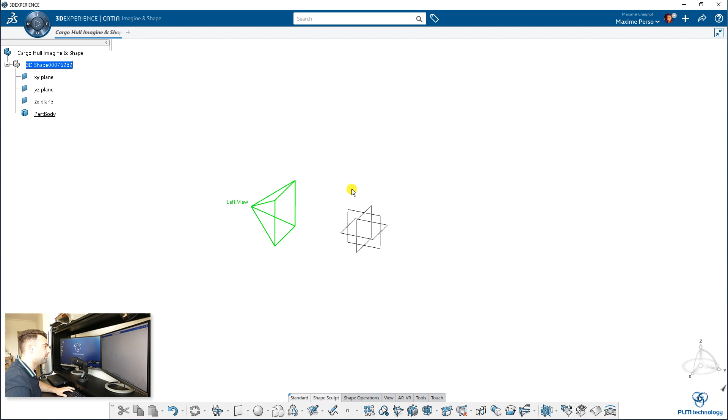It will create this part, so let's call it cargo hull. Imagine Shape, okay. And here I have my parts. So you have the classic button for Imagine Shape, and a feature I like is this diamond viewer. If you click on the Y keyboard, you can just directly have this view automatically made for you.

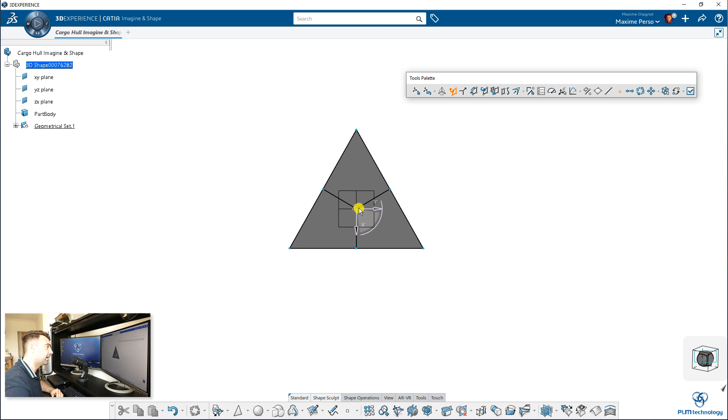I will start by making a triangle, a flat triangle, to make the hull, and I will place it in the middle. Of course, on Imagine Shape, at the beginning you don't really care about the dimension, since we can always scale it later on with generative shape design. So we start by a triangle, and I place it roughly in the middle. I can just check that it's also here on the middle plane as well.

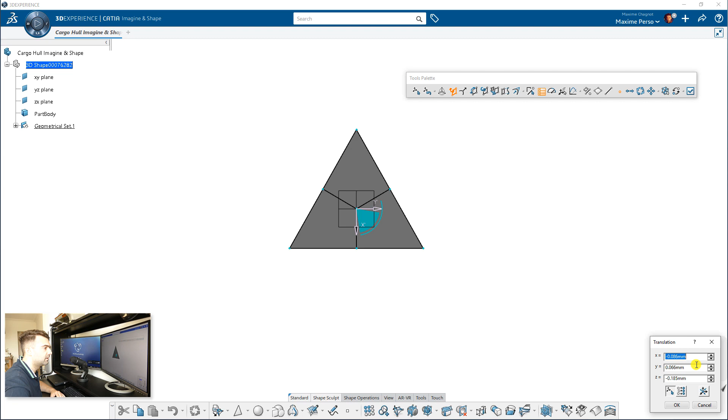Well, it's great to me. Of course, you can always make sure that it is placed at the center, so 0, 0, 0. Okay, escape to accept or validate the feature you have done.

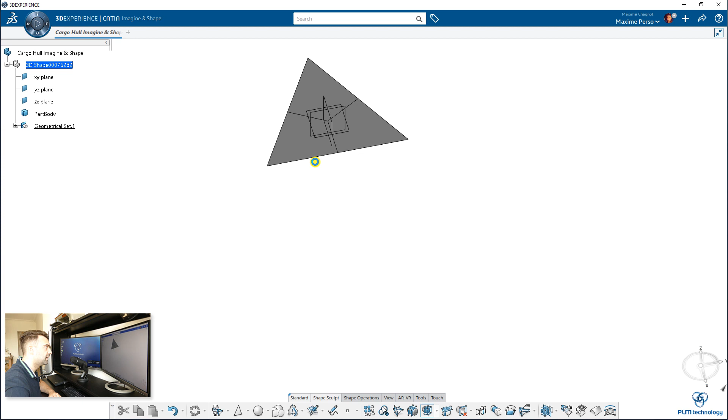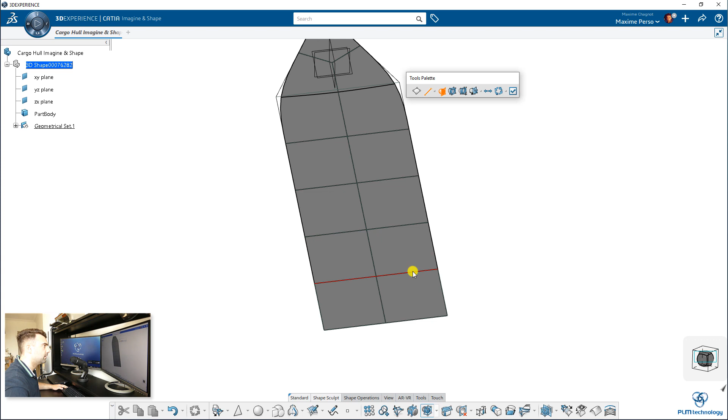I will just increase this triangle using the extrusion, and I will select the edge directly here. You have a different type, but I think I will just use this one. I will continue that way and maybe make like 8. Click on Control if you want to multi-select. Okay, so like 5, 7, and let's make another one.

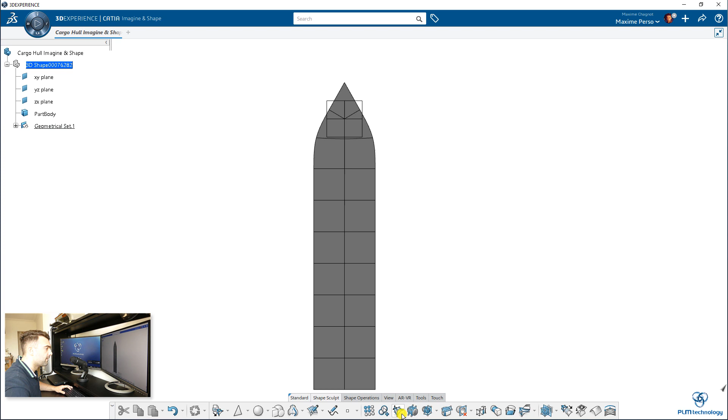It does not change that much. Click on Escape. As you can see, it's very flat, so I will just change a bit that, go on top. Select the point and click on Control. So here I selected all the points on the outside because I want to make a hull, basically.

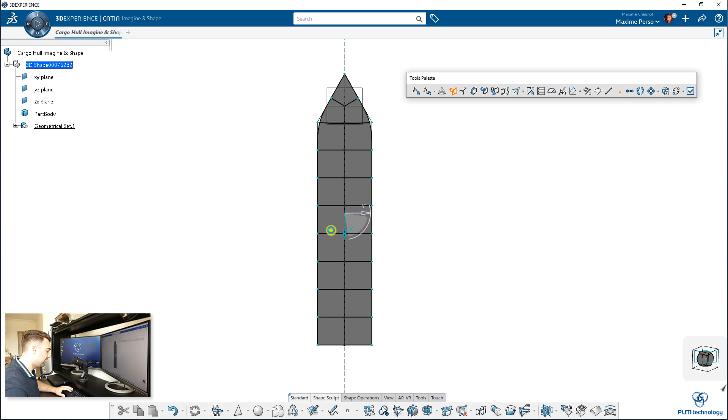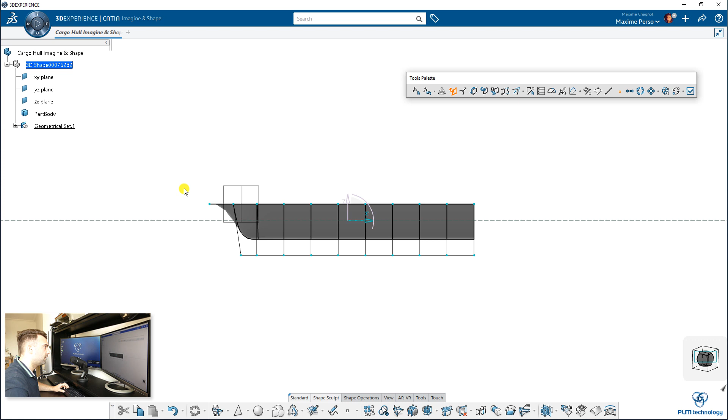If I just do that, I have a hull. That sounds more or less good. You can always move if you want this assembly. If you are not happy with that, you can always select all the points and put it back to 0 on Z. Okay, I escape, I have what I wanted.

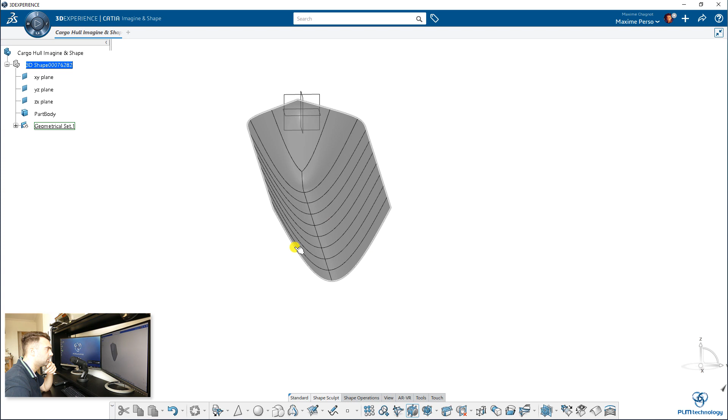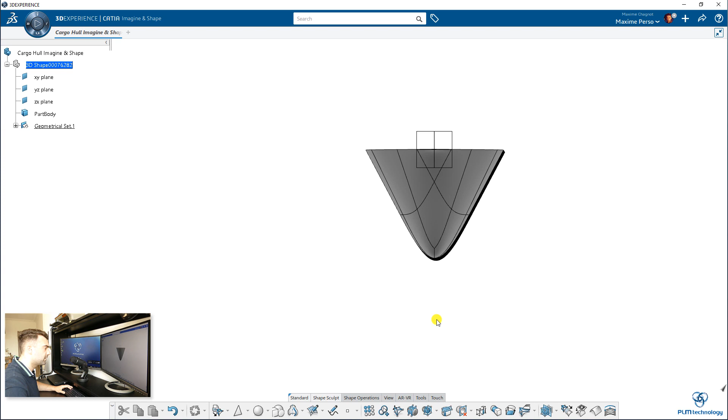It's very basic for the moment. What I recommend is to not use this one. I will just split in 2 here and in 2 here. Okay, so we can always change the shape now, but I'm going first to make this small bulb in front of the cargo by first of all doing a subdivision here.

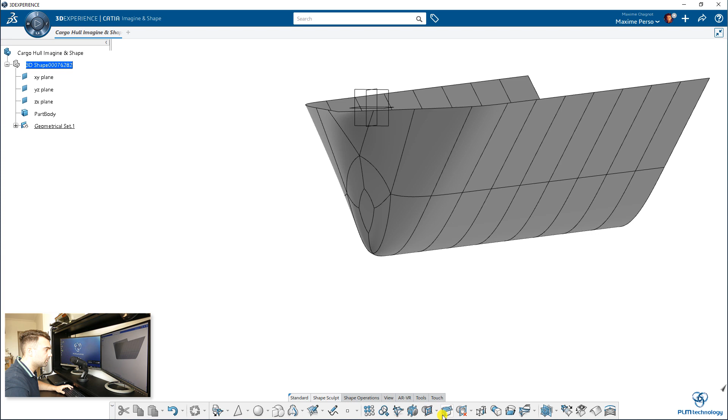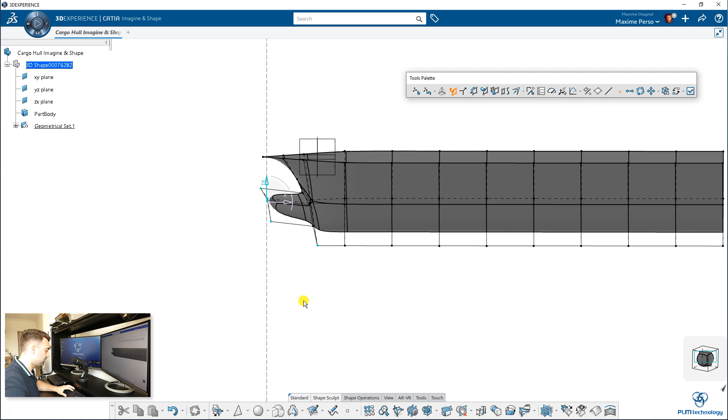Then we can have the small center here, and we will extrude that to make a little bulb. For doing that you need to use extrusion again. You select the face, okay, so it goes inward. Click on OK, and you will see it's inside for the moment, but we can always put it outside again. It's getting there, but we are far from the result we want. And now it's kind of twisting a bit, all the points, to put them back where they are.

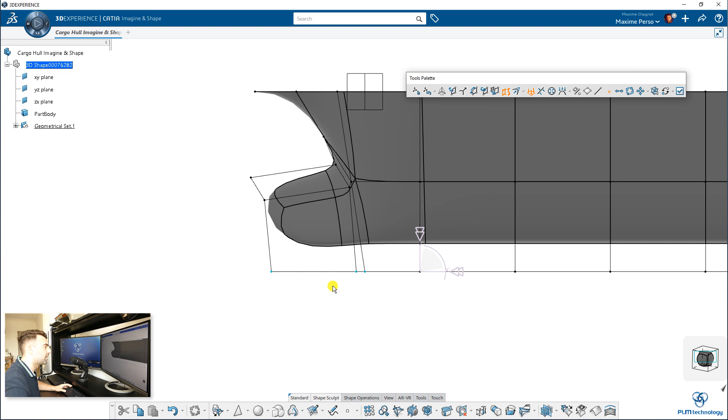When you have these, you can see here that they're not aligned. So what we can do is select all the points and move the robot to this point here that is flat, we know. And now we remove that, and now we can do an alignment. And now all the points are aligned. So now I'm going to continue a bit by doing translation of these points until you get a nice result.

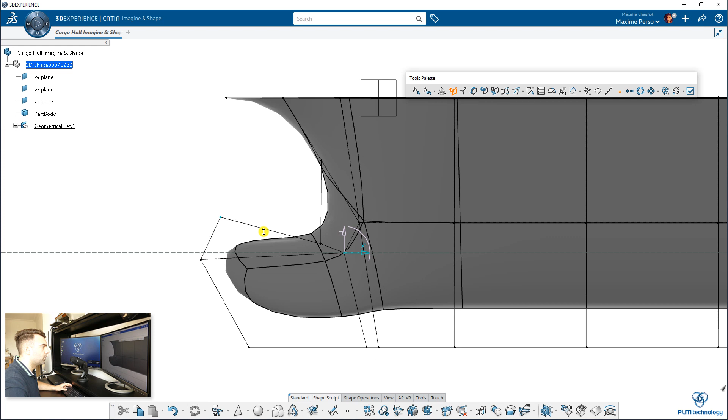Okay, that's more or less good for the moment. Click on escape, okay. It's not perfect yet, but it will become better later. What I want to do now is maybe make a bit more square hull.

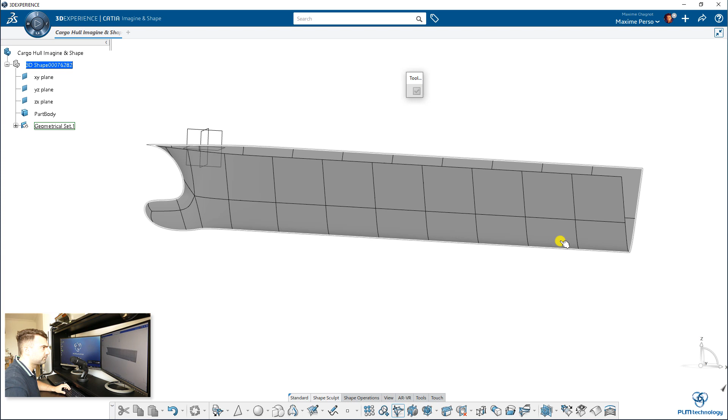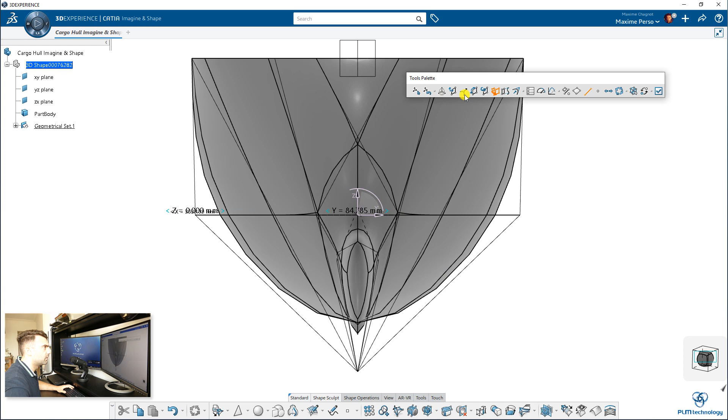So let's select this edge, for example, not up to here, but maybe here, and do it in both directions. And, oops, sorry, do a translation now to have this slightly more square, as you can see here.

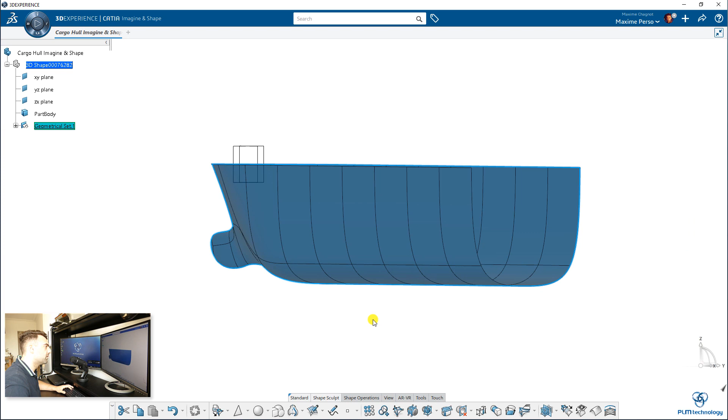What we can see is I moved the hull to a more square shape, so I'm going to put that a bit up, or this one a bit down. I'll select, I prefer to control the point here, and I will put that down slightly. Yeah, like that, and do the same with the rest here.

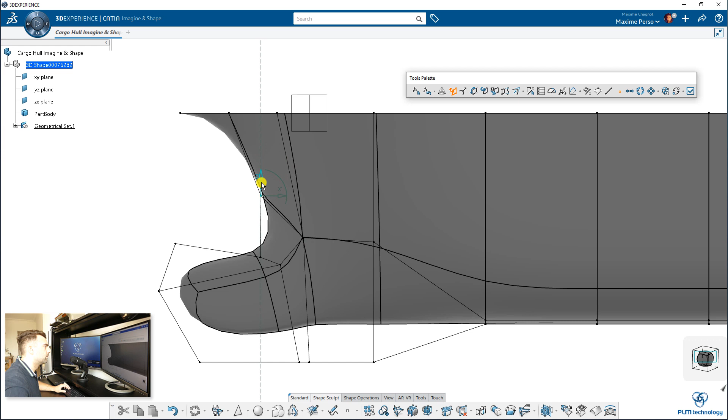Okay, looks pretty good. Of course this is a bit too thin, so we will finish with this area to make it a bit more thick. For doing so, you select this area, and let's take this point, and we do.

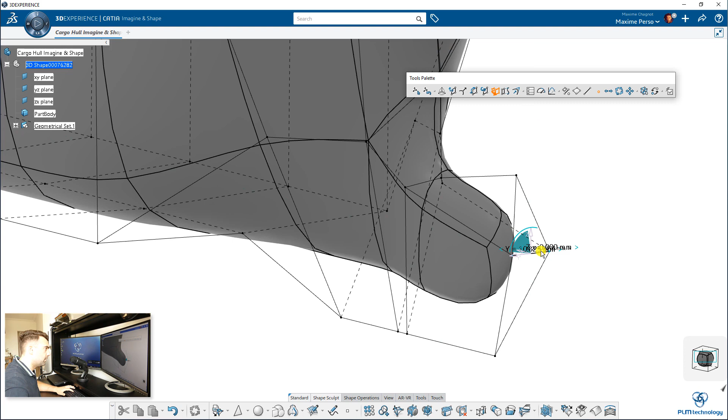So this feature is called affinity, and put it a bit more large. You can also do it for this, but not too much.

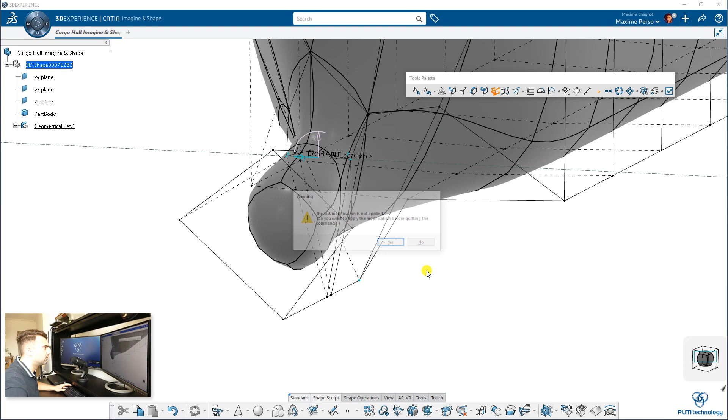Okay, now let's look at the bottom of the boat. What I would say is it's not that thick or not that large on the back, so we will just transform that.

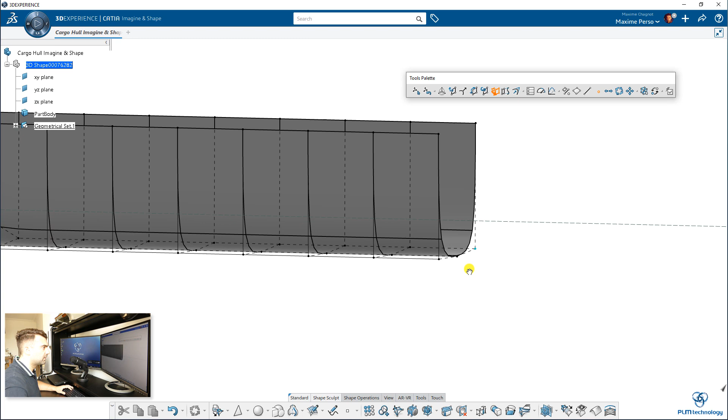Let's take this point and this point, and translate it a bit higher, like that. Same for these two here, like that.

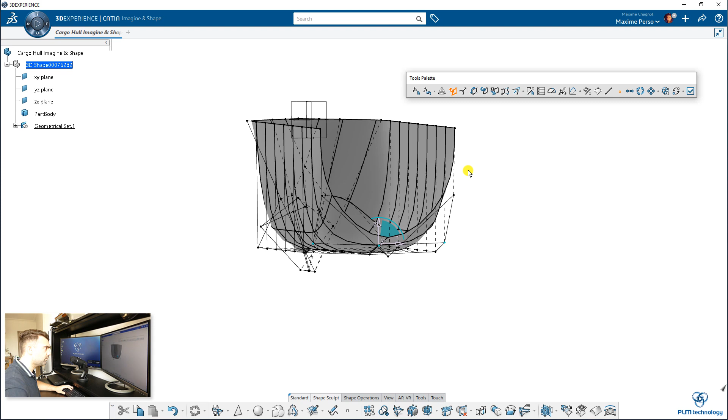Okay, and now what you want to do is on that direction, also do affinity. So let's start with this one and this one.

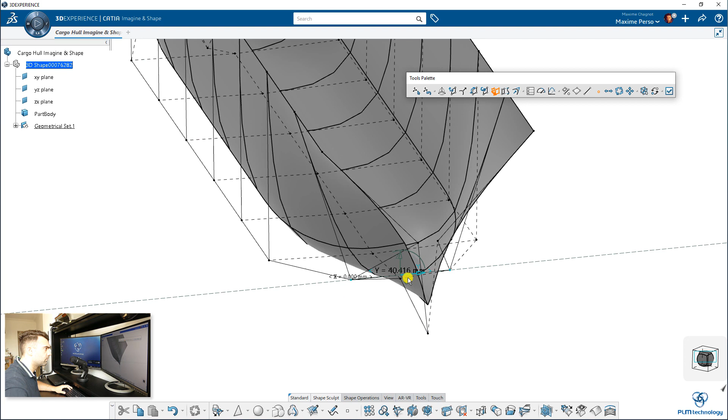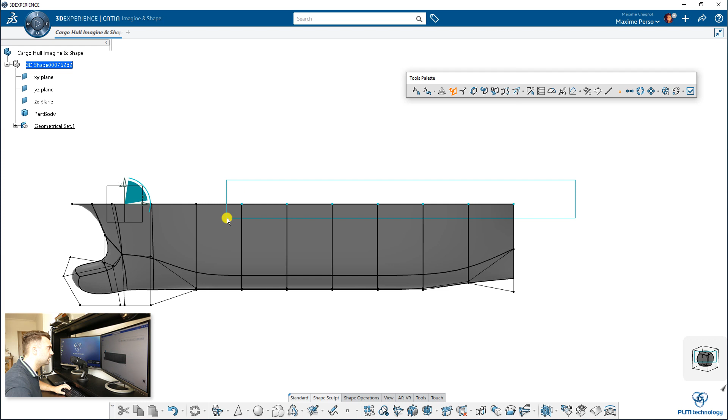Yeah, looks nice. Okay, now let's look at the top, it's a bit too high. So I will select several points here. I can also put this one. Yeah, and let's select several, maybe these. Yeah, it looks better to me.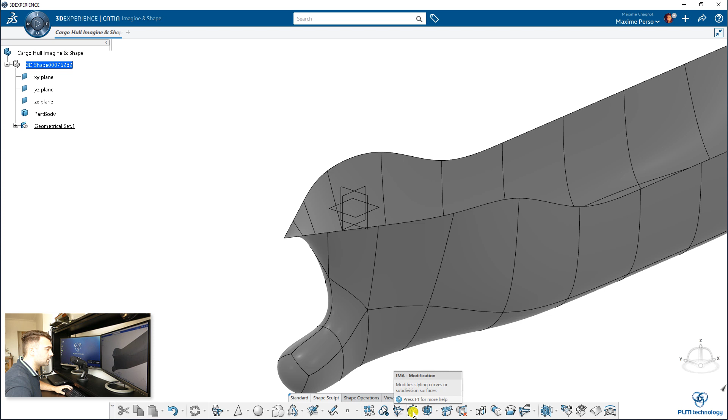Okay, and what we can also do here, so here it's a bit too sharp, but what we can do is improve it a bit by doing an extrusion. So here it is. Let's select this, click on Control when you want to do multi-selection.

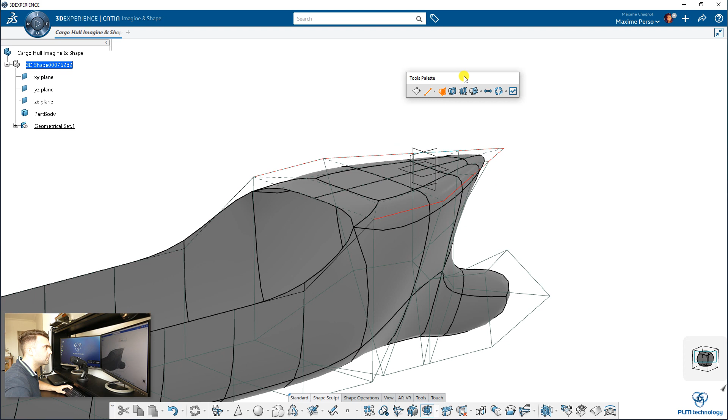And it's normal that it gives these results, because we are going to change by this mode here. Yeah, it's not that bad, except that it's a bit too high. So I click on OK, I accept the results, and now I can modify it a bit. First of all, maybe I will put all of them on the same height.

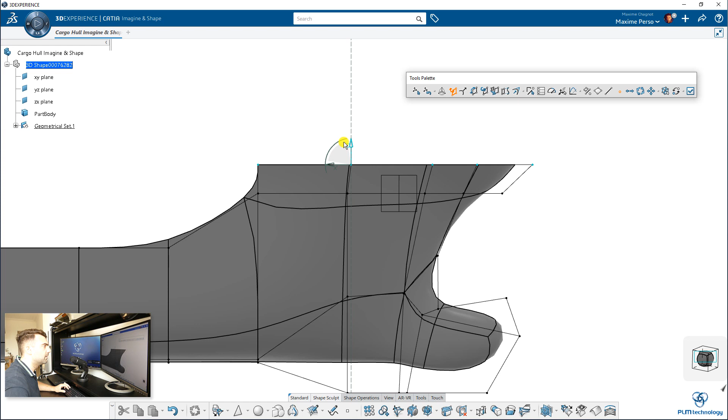So you do alignments from this. Okay, looks better now. And we will translate these points a bit lower maybe. You can do the same with this. It's a bit too high, I think.

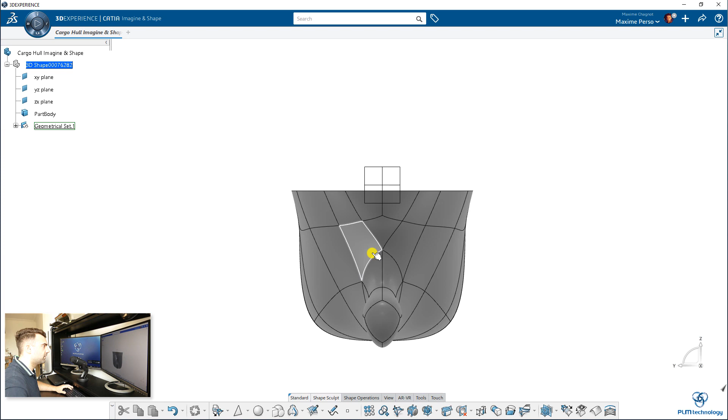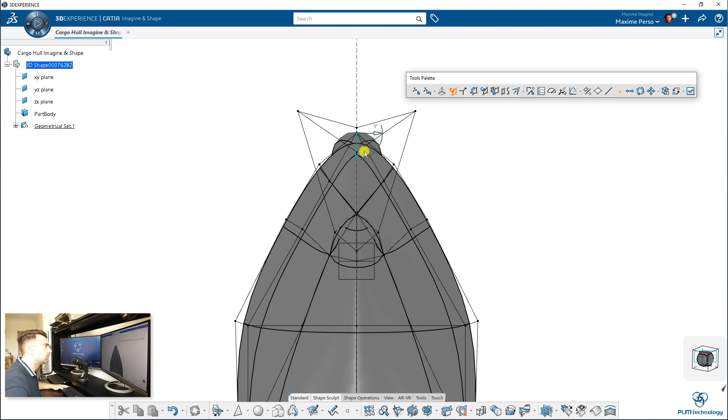Yes, okay. And well, if you're not happy with this shape, you can always modify it a bit more. I think it's a bit more round, I would say. Like that, yeah, much better.

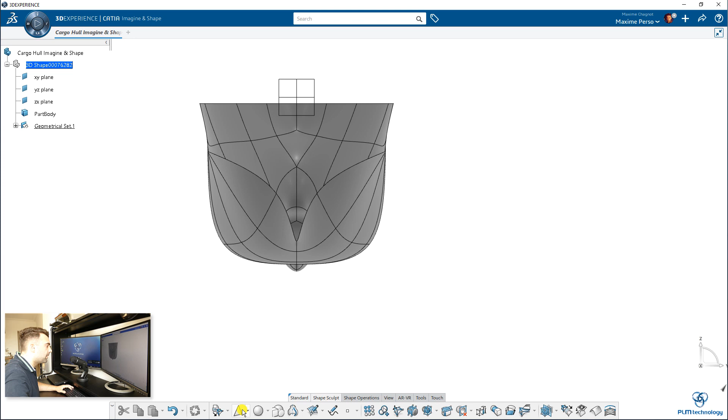Okay, and well, actually it could already be possible to use that, but maybe let's close it at the end. So let's finish a bit like how we started at the beginning, by making a triangle, and you need to rotate that. If I do it manually, it looks nice, but it's not perfect.

So I will just do 180 degrees, so now I'm sure it's well oriented, and I do the same with the translation. You want to have it in the middle, of course. So, 0. If you're not sure, you can.

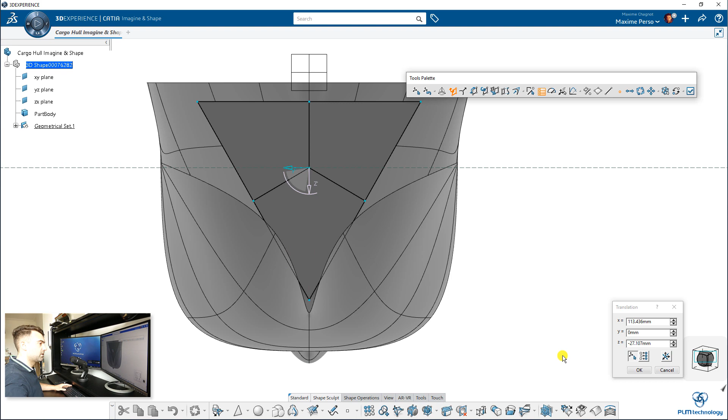Looks good to me, at least in the Y, and in the X we will move it after, and on the Z we don't need to change. So let me show you what's the problem here. It's a bit too far in, so let's put it a bit outside there.

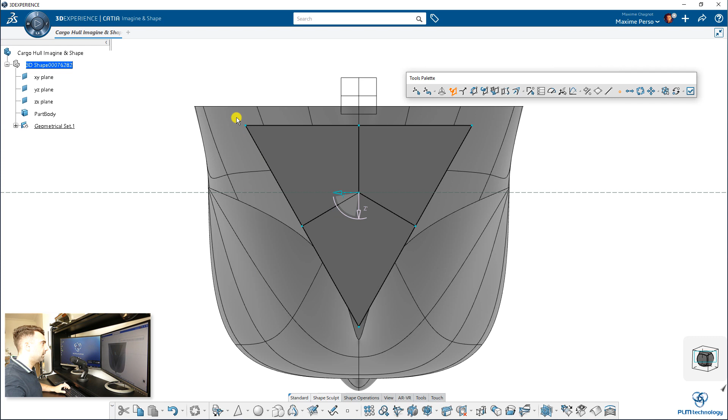Now we need to match this patch with this patch here. We just have to do it manually, and best, of course, is to use the affinity button. You don't need to be very precise here, just a bit around the same area.

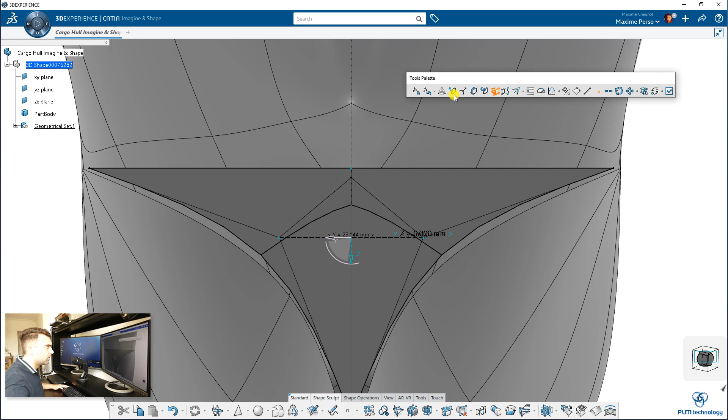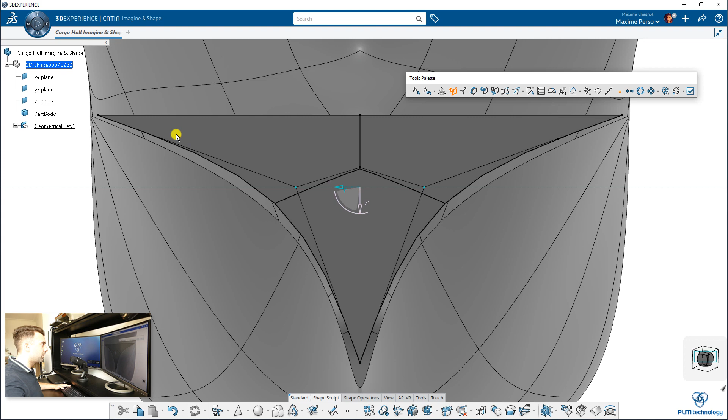So I will use affinity again, okay, same for these two. Well, it does not look too bad. Maybe a bit more up here, trying to have the same gap in between a bit everywhere. Okay, not too bad.

Yes, and we will finish by doing a small merge. You see here between this one and this one, you have two different subdivisions, so you just want to merge them. You click on Control, and it will be automatically done.

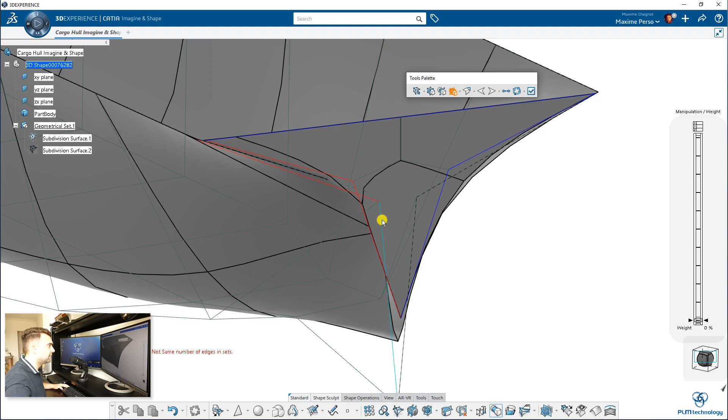And here you can decide if you want to have it very much sharp or a bit more smooth. I think in that case it would be better to be a bit smooth. So click on Enter.

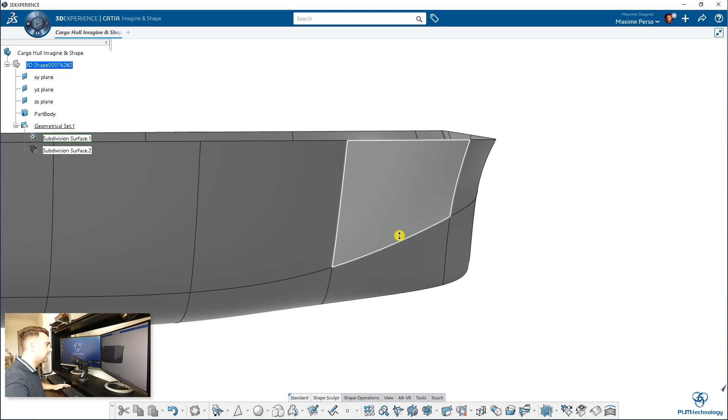And now you have your hull that is, of course, a preliminary design. So you can always twist it a bit, modify it if you feel the bulb is too big, or if you know a bit more about the marine industry, you can change the dimensions. As you can see, it's very easy to do and very fast. And the point is, if you use that for making your design later, you can always change it or use that as a library.

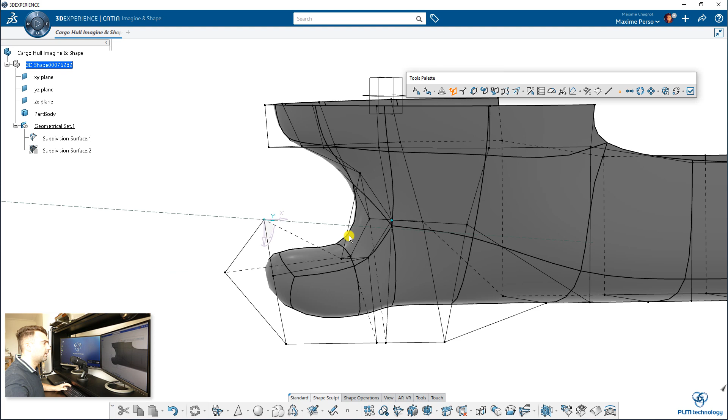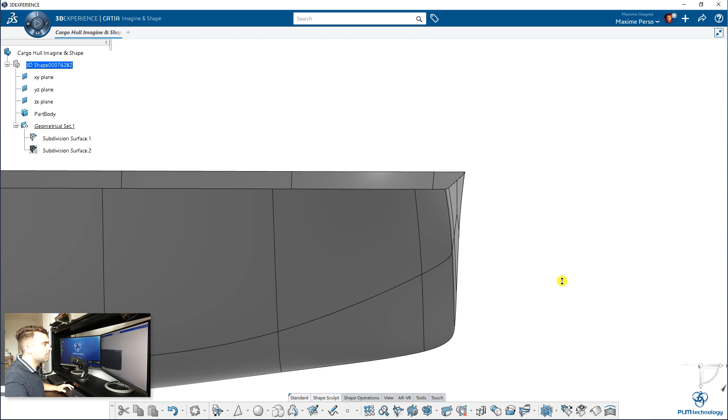Okay, and just to show you that the surface is more or less perfect in terms of continuity, we can apply a material, a very nice rendering material. You see here, maybe it's not exactly on the same line, so you can always do alignment with the bottom here. I can show you.

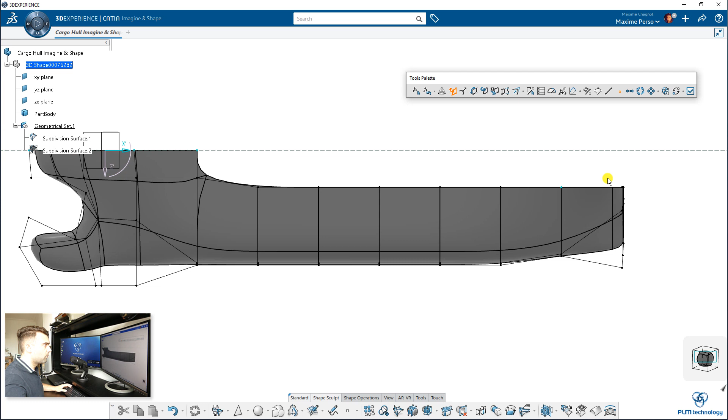If we select this and we select this, for example, and we say we translate, you want to have it on the 0 here, for example. What we can do also is these points here, you want to have them at the same height as this one.

Now it's done. So you can always twist a bit what you have done. Great, I'm going to save that.

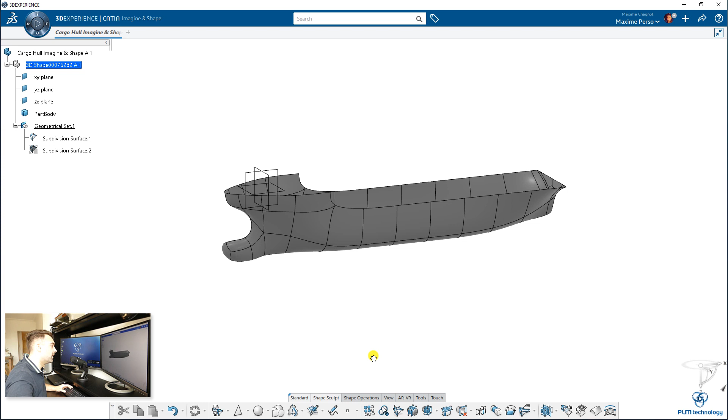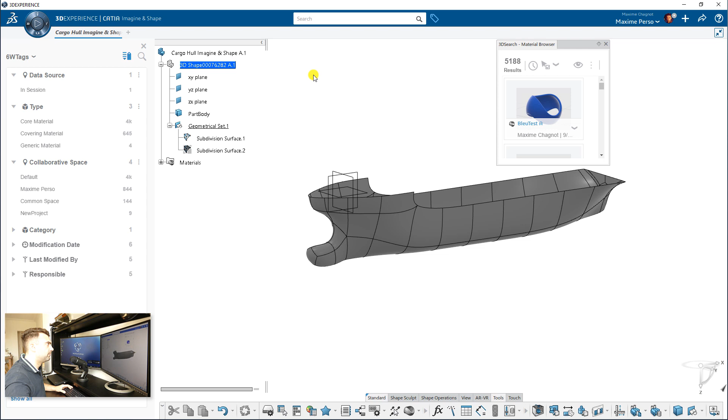And now let's apply a material. You want to apply it to the parts. Okay, it's applied, so let's move to material view.

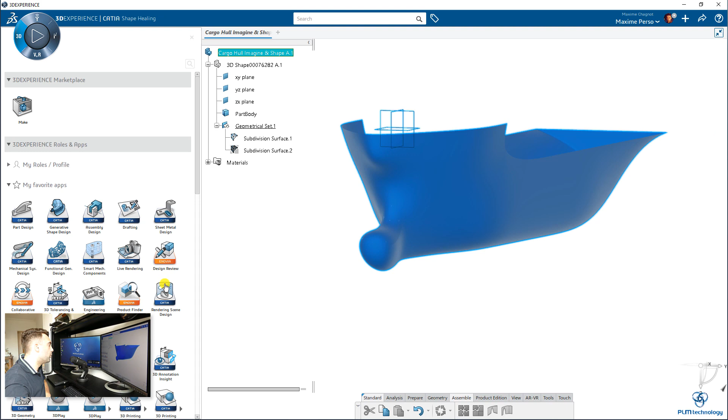And of course, well, it looks nice, but it's not easy when it's a white background, so we should put a different background. For doing that, you need to go either on live rendering or rendering scene design. So let's do the rendering scene design. I'm just going to change the background.

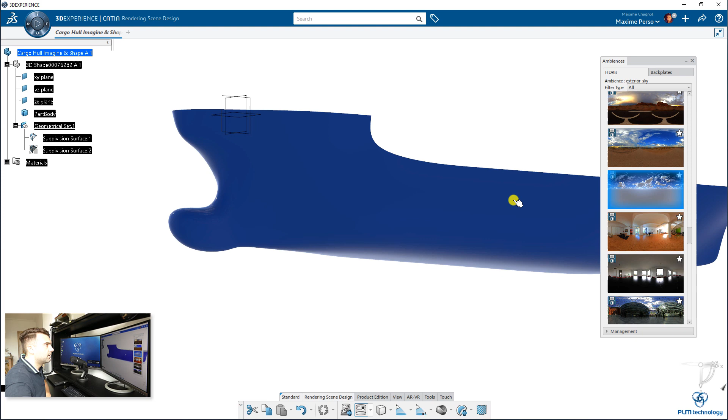So you have a catalog of different colors here. I have imported some of mine. If I select this one, and of course I put a white backplate, so you need to remove that, and we can just change it. Maybe there is water. The point here is just to show you the quality of the surface here, so even that would work.

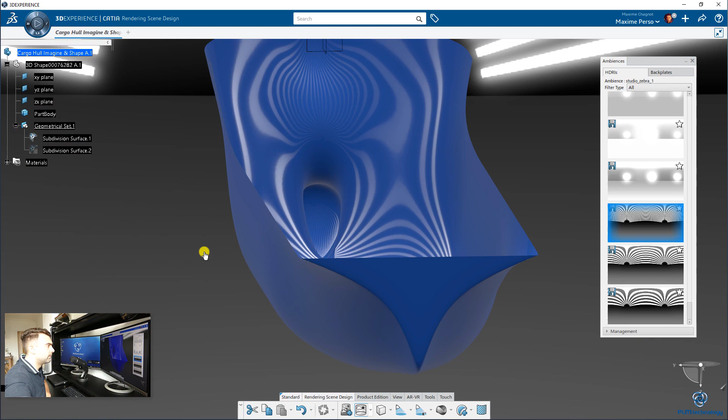And as you can see, the surface is really nice.

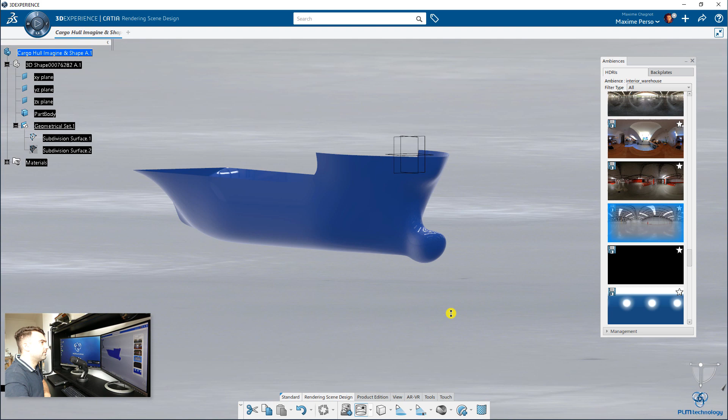Well, yeah, that was it for my video. So do not hesitate to redo this scenario. It takes some time to get the hand on the clay modeling part, but it's very robust.

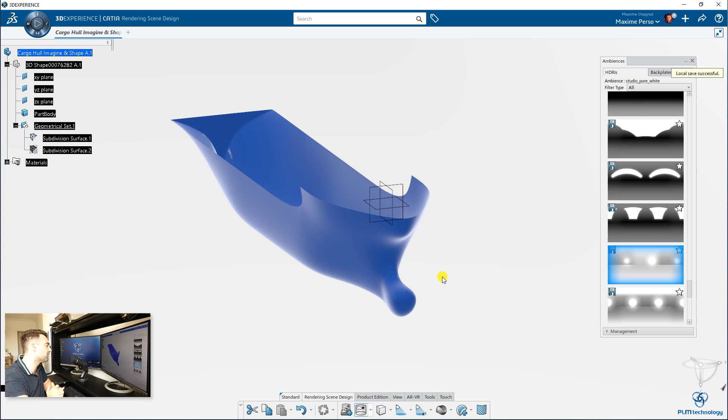And when you have done with that, remember that you can always import that into generative shape design and scale it and make it bigger. And after, you can just reuse it for a better design, a bit more advanced or detailed design. But this is just very easy. As you can see, it took about 20 minutes to make, a bit less maybe because I talked, but it's very fast.